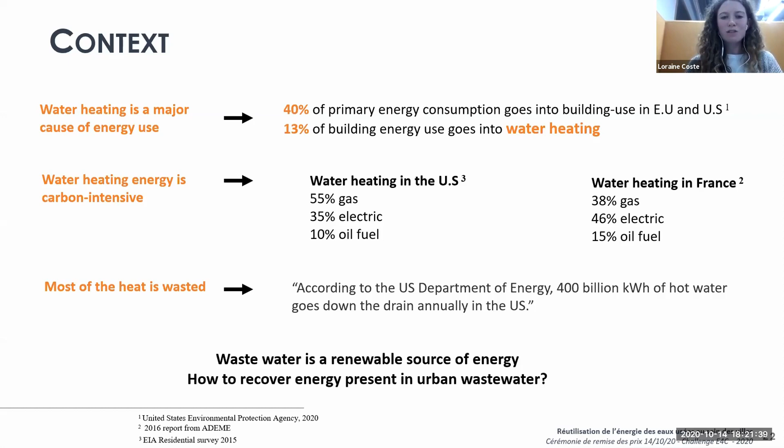Victor, your microphone is not on.

It's okay. So now I'm going to present to you the approach we used for this project. The first step was to properly define the scope of our study. This includes two main elements. The first one is the technologies. By technologies, we mean the machines that can recover thermal energy from wastewater. The second element is the segments. By segments, we mean the group of infrastructure where the technologies could be implemented. So in this step, we had to characterize, quantify, and size all of this infrastructure.

Once we did this, we compared the segment potential in terms of energy, carbon, and economic indicators of each segment. This step helped us to conceive an action plan with a roadmap and the different steps needed to implement these technologies in the city of Paris. And then finally, we assessed the impacts in terms of, again, carbon, energy and economics of the global action plan.

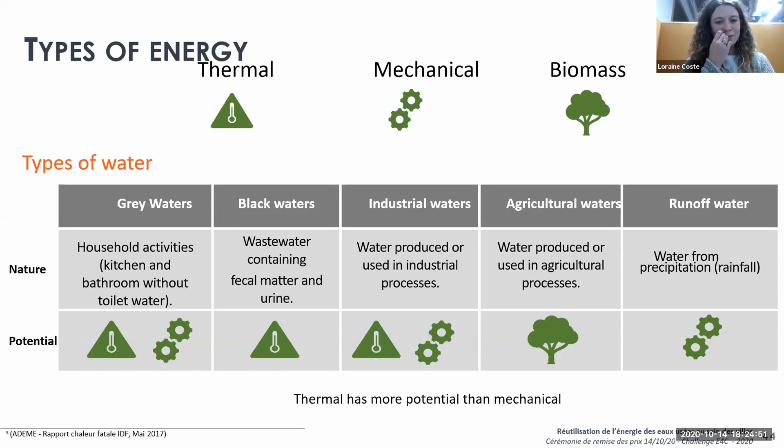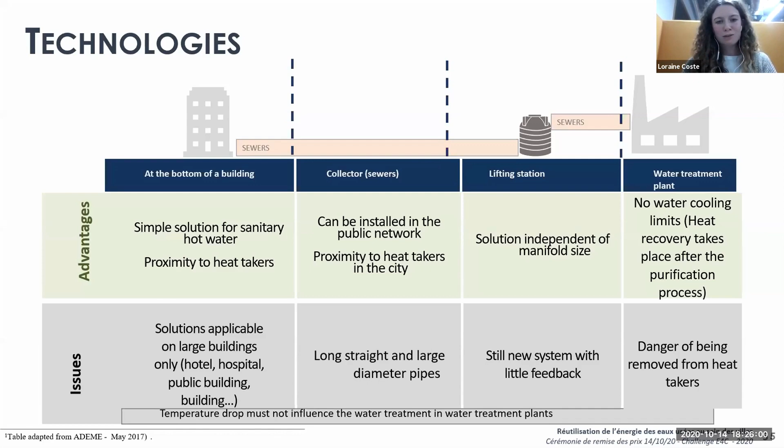So before I present the 3 technologies we chose, there are 2 concepts we wanted to clear up. The first one is the concept of heat exchangers, which is an interface that allows thermal transfer between 2 fluids. And the second concept is the heat pump, which is a system that transfers thermal energy from a cold source to a hot source.

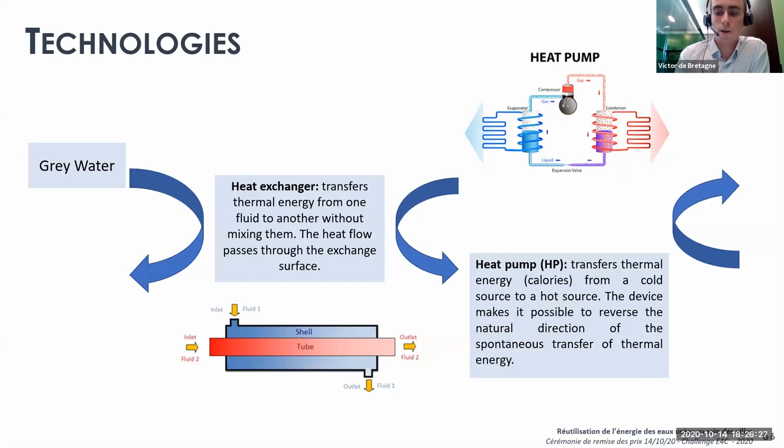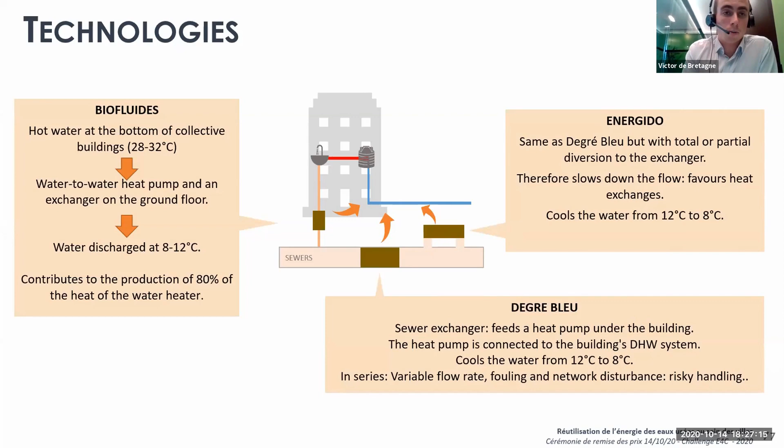So these are the 3 technologies we focused on: Biofluides, Degré Bleu, and Energido. The difference between the 3 technologies is their position in the sewage system. Biofluides is at the bottom of collective buildings with consequently pretty hot water, while Energido and Degré Bleu are both positioned downstream in the sewage system. The difference between Energido and Degré Bleu is that Energido is in total or partial diversion to the exchanger, while Degré Bleu is located directly in series in the sewer. So we studied these 3 technologies and all their technical specificities to then link them to each segment.

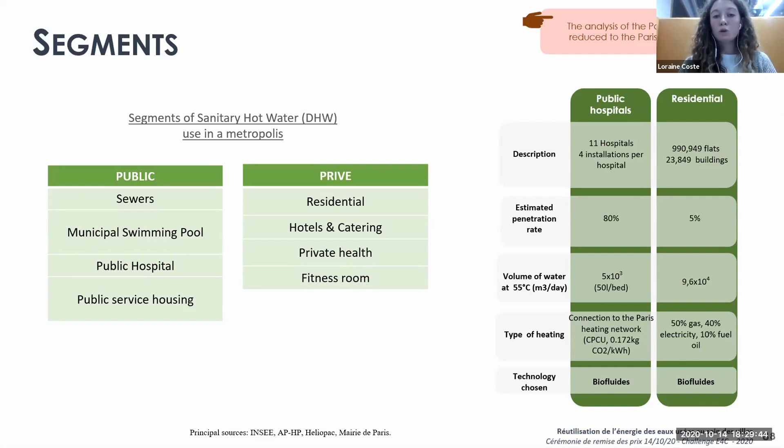And finally, we had to find the type of heating already existing in those places. For example, public hospitals are linked to a heating network in Paris. So it's rather low carbon emission heating, but we measured that our solution was still better than that one. And with those measurements, we were then able to see if our solution was good in the city of Paris or not.

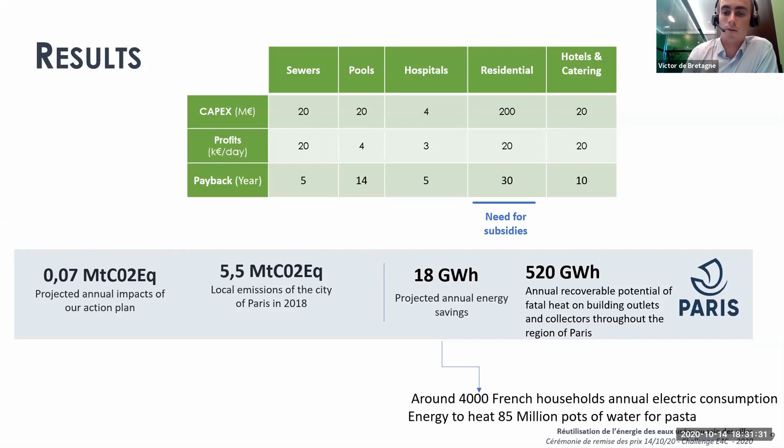Finally, what we want to really insist on is that we're conscious that this project has several limits. Of course, the results should be strengthened by the work of experts such as engineering firms. However, we remain convinced that there is a significant interest for the implementation of such technologies.

The second point on which we want to insist is that there is clearly a need for a complete cooperation of all stakeholders. By stakeholders, we mean customers, engineering firms, local authorities, constructors. There's really a need for them to cooperate so that the action plan would be really efficient.

This also means that there is a need for an intermediary actor that could be between a consultancy and a consulting and engineering team that could supervise the implementation of this technology in cities.

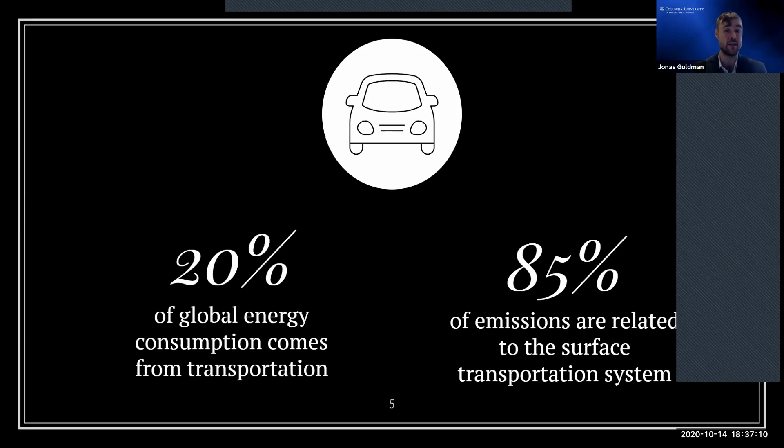And in the case of France, while emissions have declined significantly over the past 25 years, reducing 16.4% from 1990 to 2015, this downward trend in the transportation sector has since stagnated from 2015. And in the Eurozone as a whole, according to the latest European estimates, emissions have actually increased on average by 1.8% since 2018. French energy consumption is still on track to maintain stagnant emissions in the coming decades.

So vast changes are going to need to be made in French cities if the country is going to bring its energy system in line with a zero carbon limit, especially in the largest energy consumer of all, transportation.

But there is some good news. Paris is leading the way in this change, and its transportation authority has released a plan to meet all the city's bus requirements from zero carbon sources by 2025. In order to do this, it plans to bring online 4,500 buses, 2/3 of which will be battery electric, and 1/3 of which will be sourced from biomethane harvested in a carbon neutral manner.

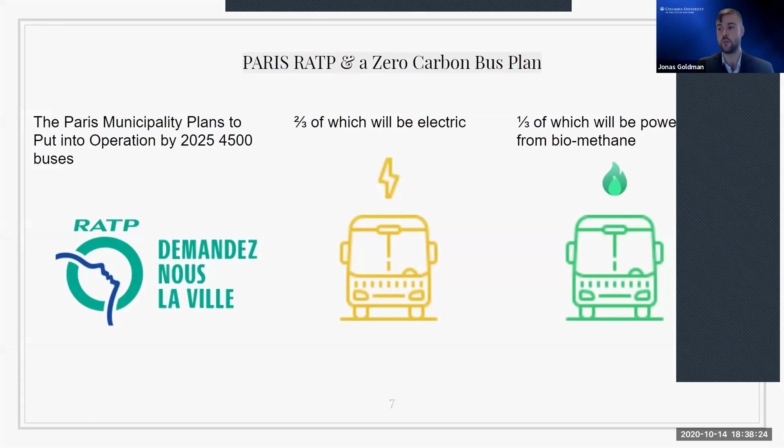However, you may be asking the question, why not just go fully electric? Well, there are benefits and drawbacks to both electric bus and compressed natural gas technology. Currently employed electric bus technology has a range of between 289 and 410 kilometers, whereas biogas fuel buses have a range equivalent to most internal combustion engines at around 821 kilometers. Electric buses also take between 48 and 97 minutes to recharge, depending on battery range, while to totally refuel a compressed natural gas bus, depending on tank size, takes around...

Factors in a fully battery electric bus would require a greater total number of buses to operate the same kilometerage of bus routes. Biogas fueled buses can travel further and take less time to fill up than current electric bus models. More idle bus time requires more buses to run the same number of miles in a given day.

Meanwhile, adopting a methane-powered bus system not only provides for greater flexibility due to the charging limits of electric vehicles, but also would save on the number of infrastructure itself, the number of coaches, the number of required service infrastructure, the number of bus drivers, and other labor costs involved in service employees compared to a totally electric bus system.

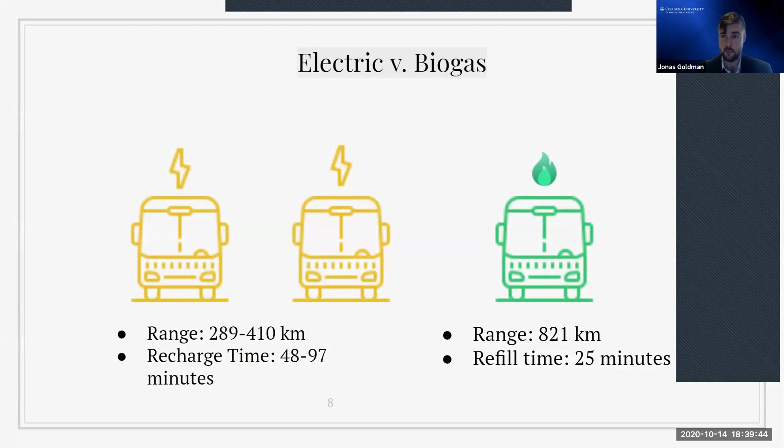Well, there are a couple ways we could power biogas from zero carbon sources. One thing that's been looked at is biofuels. While Paris has committed to sourcing the fuel for its compressed natural gas bus fleet from carbon neutral biofuels, it has as of yet not provided any details as to where these fuels will be sourced from. And this presents a slight issue, as not all biofuels are less emissions intensive than the fossil fuels they are intended to replace.

For instance, biofuels' worst offender, palm oil, due to the land use change involved in the destruction of carbon sequestering rainforests to make way for fuel crop plantations, creates a carbon debt from land use change that is estimated to take 420 years for the fuel generated annually from a hectare of palm oil to be less carbon intensive than traditional fossil fuel usage.

Rapeseed, another crop that has been touted as a source to provide carbon neutral biofuel, also has a higher emissions footprint than the fossil fuels it intends to replace and results in land use change in meeting the fuel needs.

Waste to energy is quite simply taking a waste product at the bottom of the value chain and converting it into an energy product. Currently, 2.5 million cubic meters of wastewater run through Paris every day. Our proposal focuses on how this sewage generated by the municipality can be converted into bus fuel. In order to create fuel from waste, the following chemical process will be used.

However, currently, Paris's wastewater treatment plant infrastructure collects a biogas composed of 50 to 70% methane and 30 to 50% carbon dioxide. Meaning to be used as a carbon neutral bus fuel, it would have to be further refined into a more pure methane.

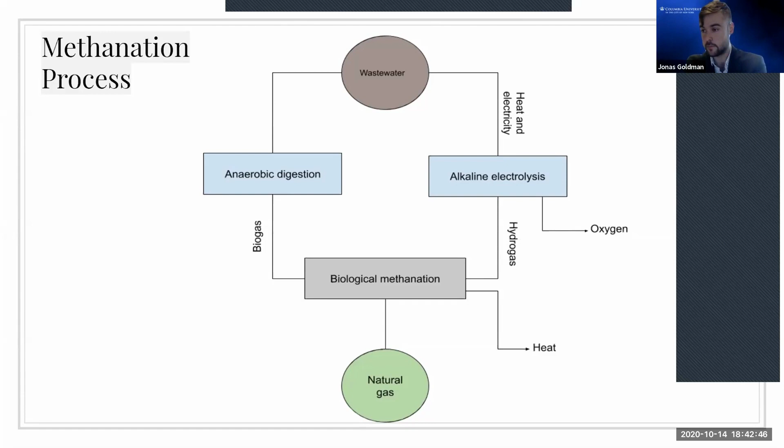Currently, Paris collects 528 gigawatt hours annually of biogas from its two largest wastewater treatment plants, the Seine Aval and the Seine Amont facilities. 86% of the city's harvested biogas, or 456 gigawatt hours, is collected from the Seine Aval plant. Of this, 60% is used to meet the thermal demands of the plant required by the sewage treatment process: heating the sewage, boiling water, while the remaining 40% of the biogas harvested is used to meet internal electrical requirements of Paris's wastewater treatment plant infrastructure.

If the city is to achieve carbon neutrality, biogas currently utilized to meet the thermal demands of the city's wastewater treatment plant infrastructure should continue to be used for thermal purposes. Otherwise, some form of fossil fuel will likely need to be shipped in and combusted to make up for the shortfall in thermal energy and to provide the necessary heating energy.

However, this still leaves 40% of biogas currently harvested from the city and used to meet the electrical demands of Paris's wastewater treatment plants that could instead be converted into biomethane and used to fuel the city's compressed natural gas bus fleet. Given the abundance of low-carbon electricity from France's nuclear output and the energy density of biogas compared to electricity, it would make more sense to utilize any available biogas resources towards meeting the needs of Paris's transportation sector, where France lacks a lot of low-carbon options, instead of directing it towards meeting stationary electrical energy demands like that of the city's wastewater treatment plants, for which France has low-carbon electrical energy in abundance.

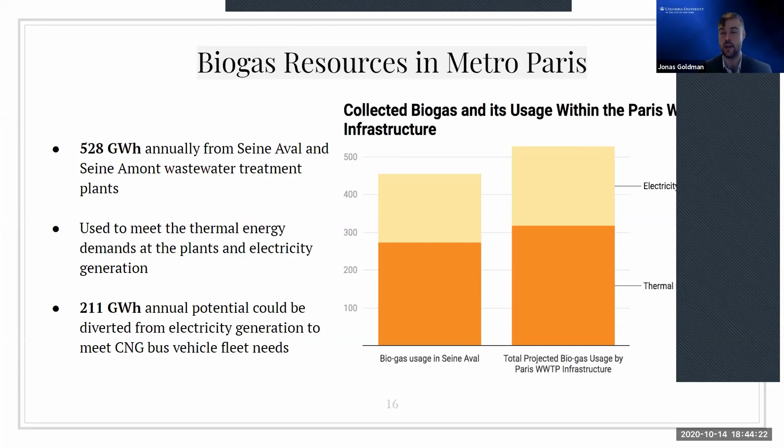So, what is the potential of this 211.2 gigawatt hours of biogas currently harvested within the city of Paris to meet the city's transportation needs? How far and how much of the bus fleet can we run off of currently collected biogas resources? Above is a snapshot from a GIS model of the total kilometers the Parisian bus fleet must travel in a day. We use this to estimate the energy requirements of the Parisian bus fleet itself and how much of the kilometers the bus fleet travels could be operated off available biogas resources.

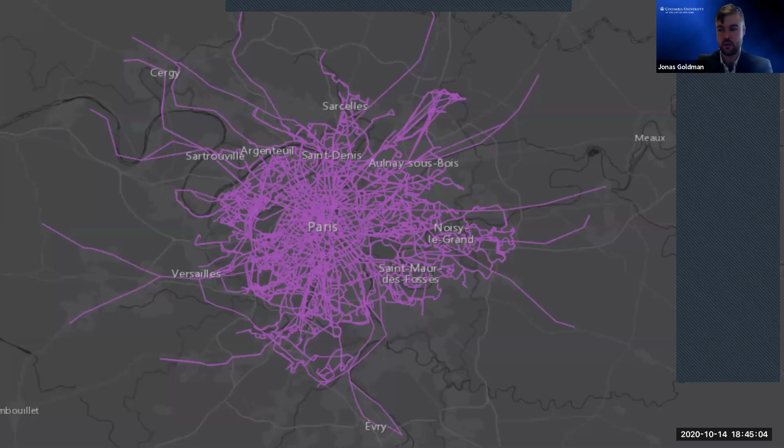We found if rerouted and refined from biogas into biomethane, the biogas that Paris currently uses to supplement the electrical energy demands of its wastewater treatment plant infrastructure could operate 89% of the total kilometers the city's buses travel in a given day. The greater range and reduced time to refuel compressed natural gas vehicles compared to battery electric buses means that each compressed natural gas vehicle would likely be expected to travel a greater percentage of the Parisian bus routes than their electric vehicle counterparts. However,

biogas that's currently harvested within the city is more than enough to meet this energy demand of Paris's compressed natural gas bus fleet. The biogas capacity of Paris currently used for electrical demand could be rerouted without impacting the thermal requirements of wastewater infrastructure, and as I said, would provide more than enough to operate its local transportation needs. Creating an energy solution that is both zero carbon, local, and resilient.

And the Paris Public Transportation Agency is already building the infrastructure to handle methane for its bus fleet, having placed an order for 1,500 buses compatible with methane. The demand for methane will be there by 2025. The question is simply how city decision makers will meet this energy demand. And this is why our proposal is so important. As while the Paris municipality has stated its intention to operate its compressed natural gas bus fleet solely from carbon neutral biomethane, it has not yet released a plan as to where these resources will come from.

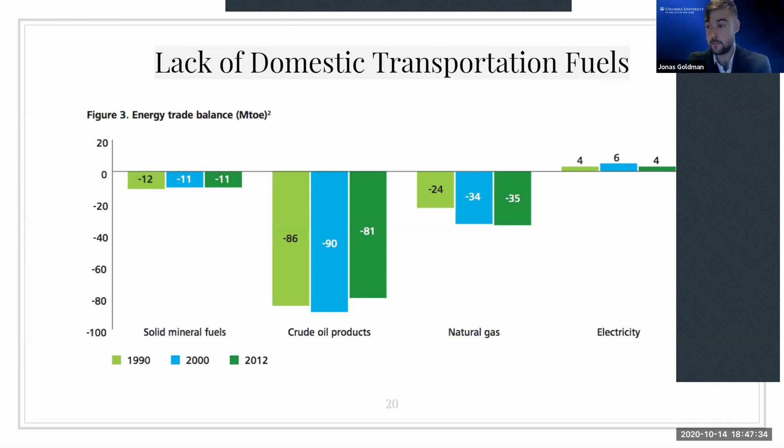In conclusion, we believe that by looking at Paris and other cities as an integrated energy system, a more strategic optimization of energy resources can be made within the system as a whole, rather than what is currently made by decision makers within the information silos of their own organizations. It makes sense for the managers of a city wastewater infrastructure, given the realm that they oversee, to utilize biogas for electrical energy needs of the plants they operate.

However, when the needs in terms of energy mobility and the limitations of existing battery electric bus technology are considered, energy use can be optimized by utilizing available biogas for use in transportation and sourcing the resulting electrical energy requirements of wastewater treatment infrastructure from the grid for stationary electrical needs. So we can actually meet both transportation and wastewater treatment plant infrastructure electrical energy needs in a carbon neutral fashion and meet our goals under the accords that bear the city's great name.